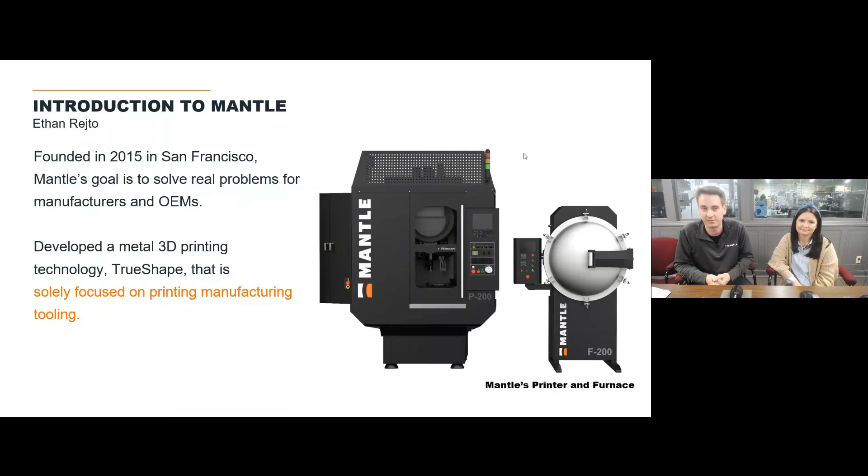Just a little bit about Westminster Tool. We are a predominantly injection mold builder located in the northeast corner of Connecticut. You've probably heard about us, we've gotten a lot of representation on our culture. We have a pretty unique culture here focused on emotional intelligence, accountability, improvement, and learning. We have an average age of about 35, and so we've definitely gotten a lot of attention for that. But we really pride ourselves on being manufacturing solution providers, so we really like to roll up our sleeves and solve problems for our customers.

And today we're going to talk to you a little bit about some of the ways that we've done that by partnering with Mantle.

In terms of what we make at Westminster Tool, on the left you can see we predominantly build complex injection molds, anywhere up to around 64 cavity, anything up to a 350-ton press so that we can sample it in-house before shipping it. We focus on intricate dimensional challenges where our pre- and post-value add services can be utilized. We also manufacture composite tools and high-performance components for the aerospace industry, things like molding PEEK, Torlon, Ultem, and we're AS9100, ISO 9001 certified, and ITAR registered.

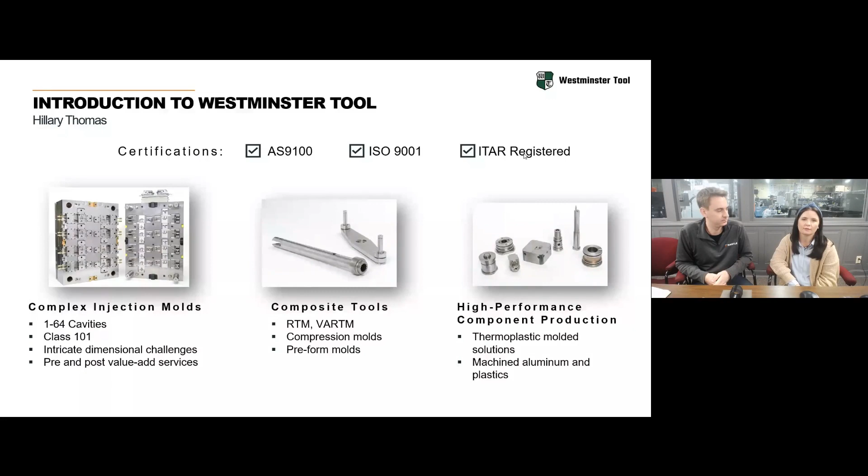So quick agenda for today. We'll start by talking about 3D printing and its role in toolmaking, both in the past and where it is today. We'll talk about Mantle's technology, how it works. Hillary will talk about Westminster Tool's experience with Mantle's technology and how they're utilizing it here in their tool shop. And then we'll look at a bunch of different use cases of Mantle's technology, some different applications of how a lot of different people are using this technology and adding value to their organizations.

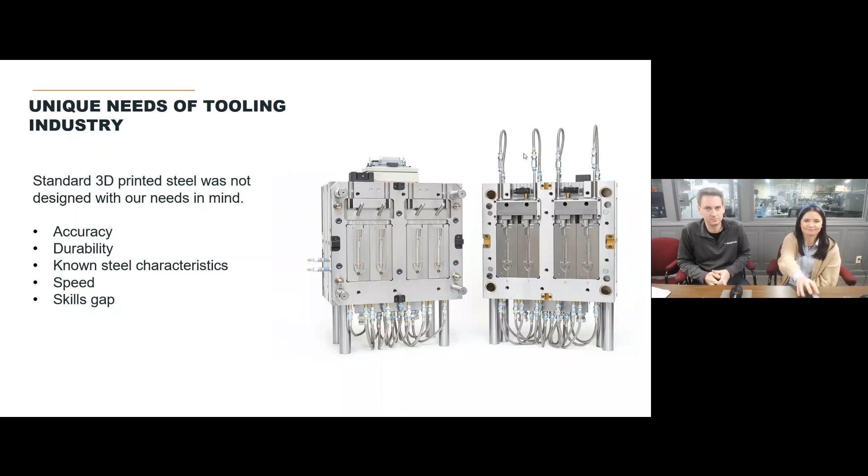So in terms of our specific journey with 3D printing, we've been exploring additive metals since 2017. This is mostly driven by the fact that we want to be a leader in innovation for our customers, but also our customers really needed us to expand here. Our customers have been looking for conformal cooling, and they've been looking for us to find ways to deliver faster and more affordable solutions for them.

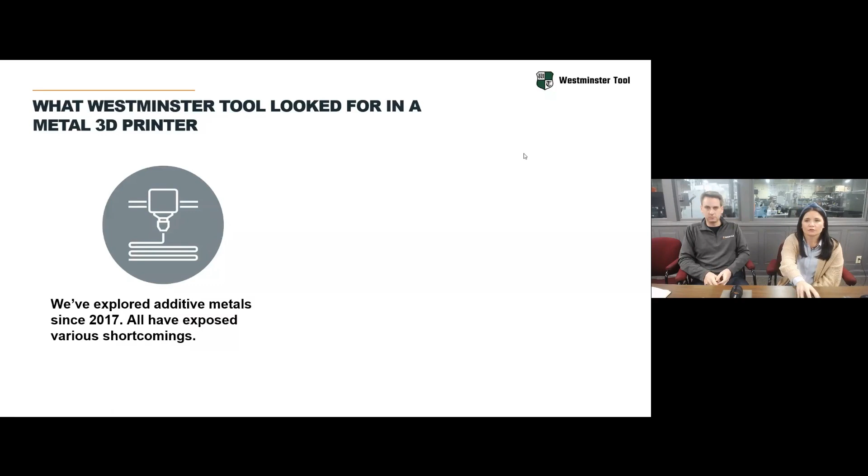So some of the things that we've been looking for, the first would be tolerances. We're hitting tight tolerances. Anything over plus or minus 3 thou really isn't going to get us close to where we need to be, and there's a lot of post-processing that's going to be needed in order to get us there. So that was really a key point. And prior to Mantle, there really wasn't a technology we had explored that could get us under 3 thou.

We're also looking for flatness and stability. I saw that there was a handful of tool makers here, or at least have tool rooms. And if you've worked with 3D metals before, historically the moment you go to machine them, they move all over the place. So if I have to have my most experienced tool maker, or carry a handful of spares, or go above and beyond in order to bring this piece of steel into spec, why wouldn't I just do it the traditional way? That's something we've really struggled with in the past.

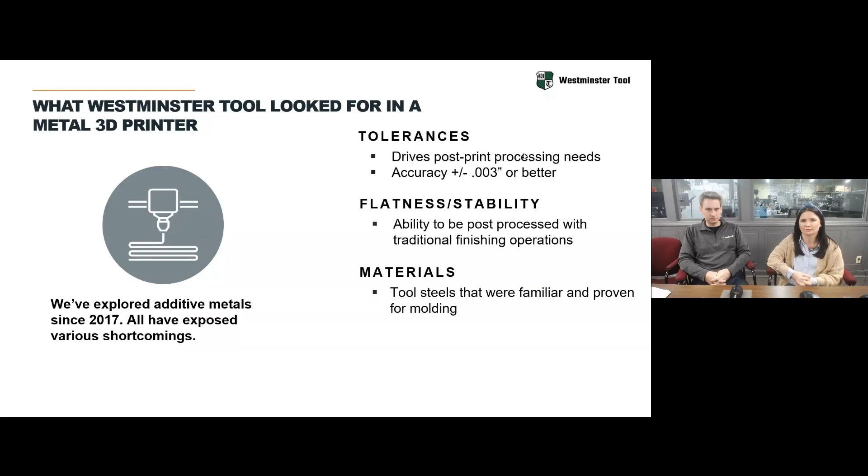Another thing is materials. We have experience where the tool steels weren't familiar or proven within molding. And so not only were we hesitant to utilize them, but we really weren't confident that our customers were going to be willing to integrate them into their production molds.

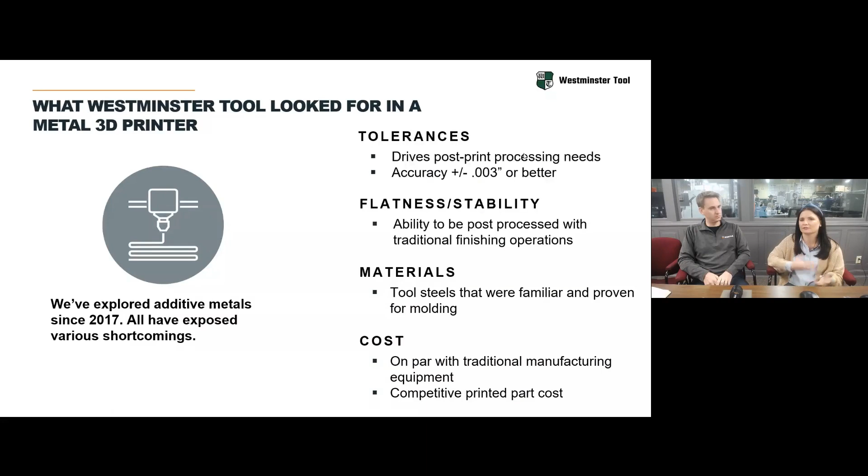And lastly, cost. So I look at cost in two ways. The first is my investment. As a tool maker, I only have so much capital investment that I'm making within a year, and I didn't want a 3D printer machine that was going to take up years of that investment. And I also didn't want to have to price my 3D printed inserts so high that it no longer was valuable to my customer. So this was kind of what we were looking for and the challenges we were seeing until we met Mantle.

So we met Mantle in 2019 at the AmeriMold conference, and we immediately started doing the basic tests that we were doing with all technologies that I'll show you in a moment. But they quickly were surpassing what we had experienced before, and we got very excited.

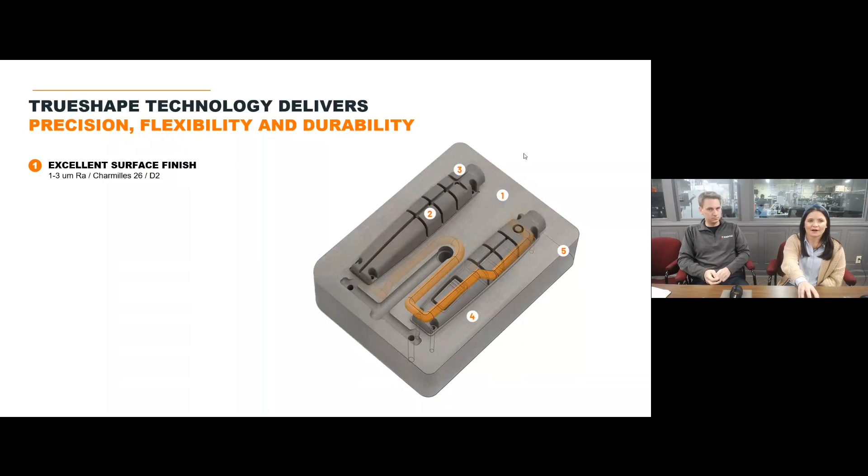Some of the things that we were seeing with them, the first is the surface finish. So they come off of the printer at a D2 or like an EDM Charmilles 26. And I have a handful of inserts here that you can see, but here's some examples of what it looks like. I didn't have to touch any of the part geometry in this. So that's what the surface finish looks like coming off of the printer.

And for us, that was huge. It also, you can see when you're looking at the prints, you can see the density of it. There's no voids or pitting, and that was consistent even if you sliced open a block that you had printed.

Another great thing that we saw with Mantle was accuracy. We're achieving plus or minus 1/1000th per inch. And this was huge for us. In some instances, since integrating the machine, we're seeing even tighter tolerances than that. So this was, again, a leap forward in being closer to that finished product after printing.

We're able to achieve very fine details with Mantle. We're able to get down to a 5 thou corner radius. And so we're able to achieve some of the sharp details that you're seeing in these images. And again, that wasn't something we had seen in the past.

Flexible cooling designs. I'm actually going to talk to you about a handful of conformal cooling applications we've done. But we did put Mantle to the test, and we wanted to prove out that the surface finish and density of this was actually going to withstand some of the cooling channels that we wanted to put in.

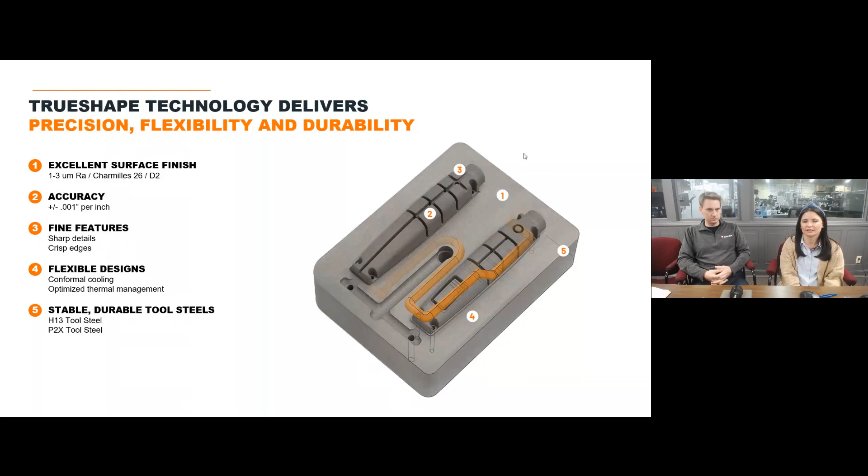I think a very important one for all of us is the stability. It performs and acts exactly like standard tool steel. It has the same chemical properties as standard tool steel. So they have an H13 and a P2X material, which I know Ethan's going to talk a little bit more about.

And lastly, the machine is extremely easy to use, and that was something we were very surprised to see. We would say you basically need some entry-level CAD experience, some entry-level CNC experience. But Ethan's going to tell you about how the programming really does a lot of the work for you. So the software does it for you. You don't need an expert in programming and understanding how to operate this.

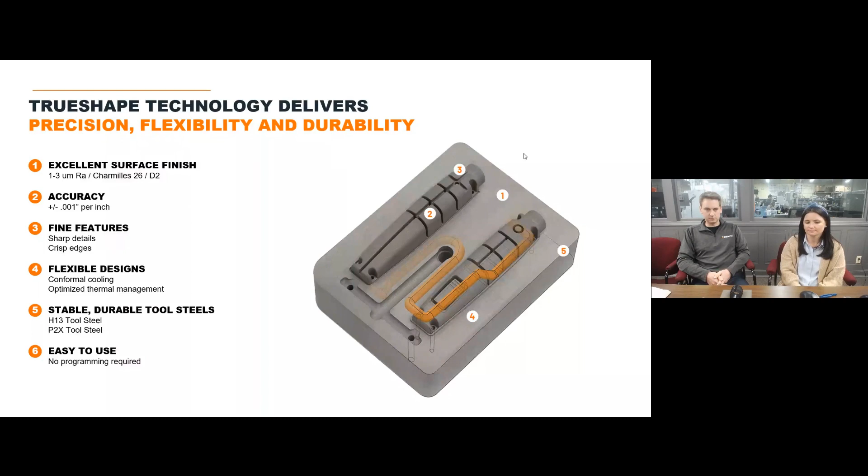So I think for most of us looking to integrate printed steels into our molds, this is really what matters. It matters that it is compatible with traditional manufacturing operations. And this was something that we spent years proving out with Mantle. We have polished it to an A2 finish. We have welded it. We have chemically etched it. We have wire EDM'd it. We have sinker EDM'd it. We've drilled, we've ground. I mean, we've done everything that you could.

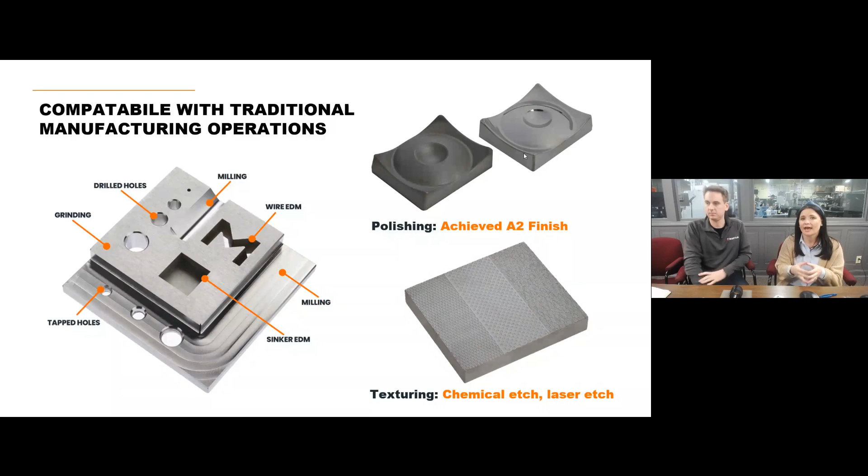Yeah, this is a really great photo here where you can see a handful of different operations being done. And what's impressive is not that you can do this. What's impressive is that I don't have to change my operations in order to achieve it. And so there's no added resource or added time in order to finish machining it. So the savings that you get from printing and sintering actually translate into value.

Awesome. Yeah, so as Hillary mentioned, Mantle's technology was able to achieve what they were looking for with metal 3D printing and what they needed for tool making. And the reason Mantle was able to do that was because Mantle was designed specifically for printing the tools that she's making and using every day. We set out to print the inserts, the molds, the components going into molds that tool shops, plastic processors, and injection molders are using, which is what's so unique about Mantle's TrueShape technology: we were designed specifically for printing the tools you're using every single day.

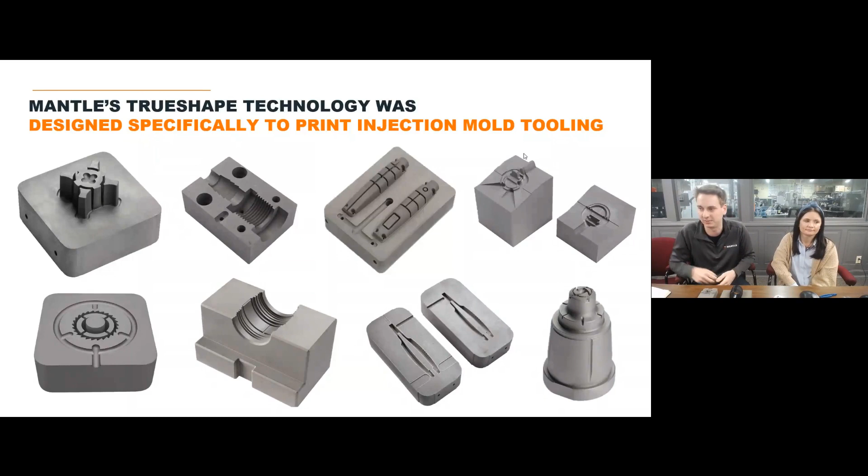So with Mantle's TrueShape technology, we're offering the accuracy of a CNC machine with the added benefit of a 3D printer. You're getting all those benefits that are widely known with 3D printing, from lead time and cost, to ease of use, to flexibility with design, but with that added accuracy of CNC machining. And I'll talk a little bit about how that's working in just a couple of minutes.

Additionally, the system is designed and priced for every single shop. As you may see, it looks very similar to a CNC. It's designed to be on the shop floor. It's designed to sit next to your EDM equipment and your CNC machines and your grinding equipment. It will sit right at home on your shop floor, making it very easy to implement and very accessible for all shops and processors.

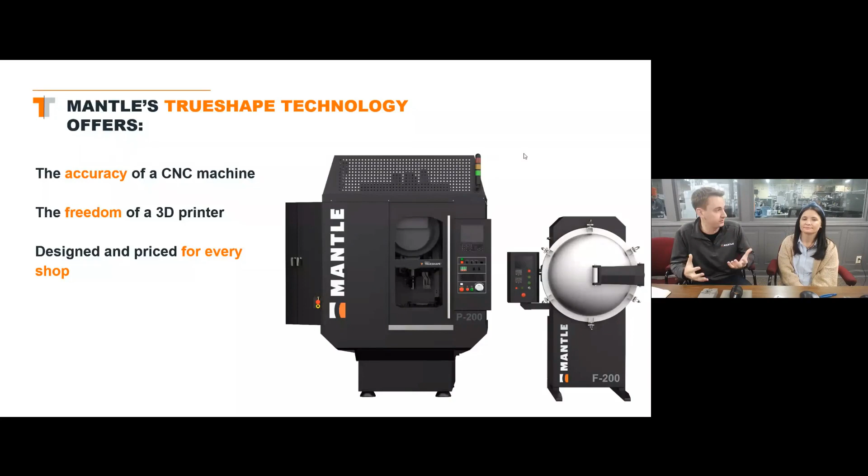One thing I want to say is that Mantle didn't just set out to design a very cool 3D printer, or something that can print accurate parts or surface finish. At the end of the day, Mantle set out to make a difference to the injection molding community, to the tooling community. And Mantle technology has shown results.

We're going to talk a lot more about use cases later on, but I just want to briefly talk about this relatively small insert that was used for molding a consumer product. The accuracy on this insert was within a thou. The surface finish was equivalent to a standard insert that they would have made with traditional processing.

The parts were all standard to the traditional process as well. And after over 200,000 shots, there was no wear on this insert. But what really matters was that the company was able to produce this insert with a 70% lead time savings and a 65% cost savings.

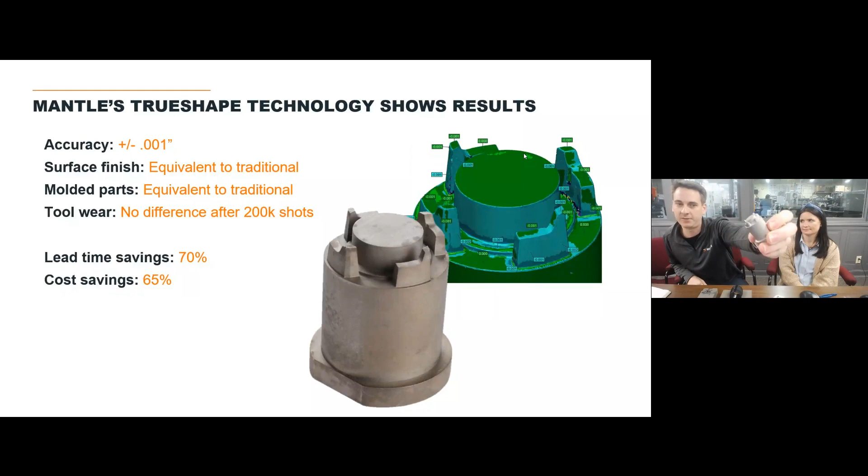Because at the end of the day, it's great that we can print accurate parts. It's great that we can print parts with beautiful surface finish. But what really matters is how are we adding value to a manufacturer, and how are we making a difference and solving the problems that people are having today, which are often really high lead times and very high costs.

Another quick poll before we get into talking about how our technology actually works and how our 3D printer works. I'm curious to hear, what is your current experience with 3D printing, and how are you using 3D printing today? Awesome. Seeing some results come in. Yeah.

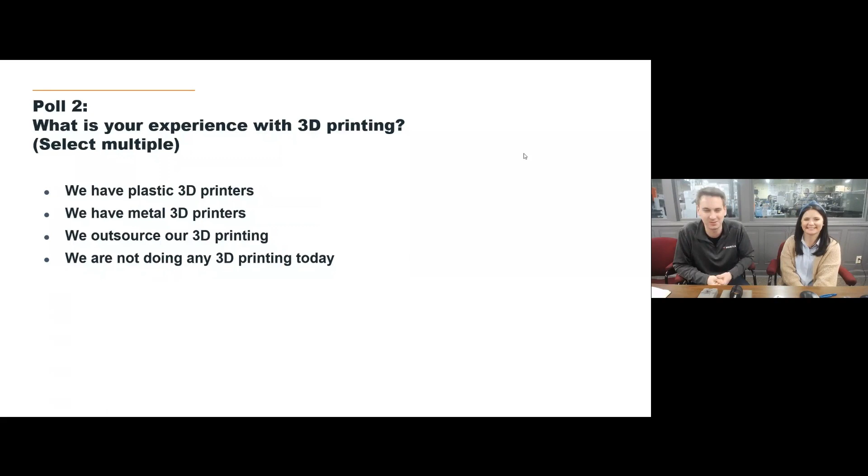It's great. So it looks like a lot of people doing plastic 3D printing, which is awesome for prototyping, form and fit, for jigs and fixtures. Awesome to see a lot of people doing plastic printing, a couple people doing metal, a couple people outsourced, and then obviously a couple people who aren't, right, that's why you're here today, to learn more about 3D printing in general and maybe looking to do it in the future.

So to talk a little bit about how Mantle's technology works, Mantle's technology is really a solution. We call it TrueShape technology, and it's made up of a couple of different building blocks that you're seeing on the screen here now. When it comes to hardware, there's both a printer and a furnace. And again, as Hilary mentioned, designed to be very, very easy to use. Minimal training, very easy to operate. It's designed to go onto the shop floor using similar power and air requirements, etc., so it will sit right at home on your shop floor.

When it comes to software, we're kind of the brains of the whole TrueShape operation. Very, very easy to use. It's going to automatically generate all those tool paths for you, both additive and subtractive, and we'll talk about how that works. And of course, there's no CAM programming required, so you don't have to be an expert in any CAM software. Realistically, we could train anyone on this call how to use this technology very easily in just a couple of hours.

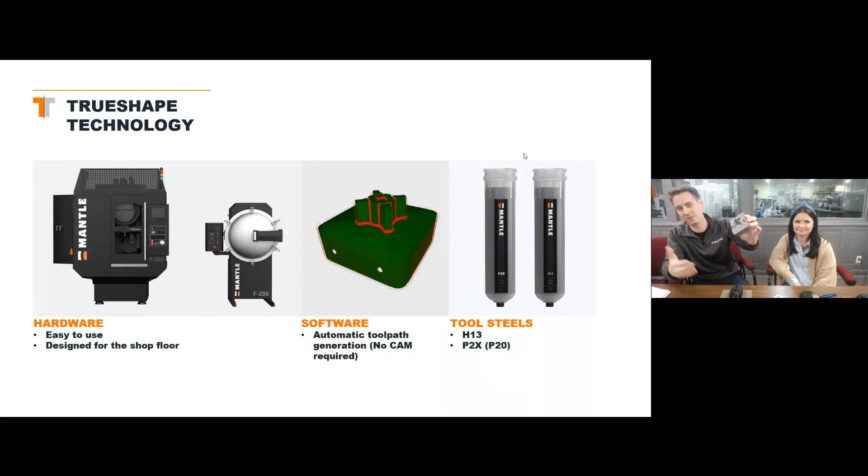And then finally, our materials, our tool steels, as Hilary mentioned, H13 tool steel, a very common tool steel in the injection molding industry, and then P2X, which is very similar to a P20 material. Our tool steel, as you may see, looks a little different. It starts as a paste, and I'll talk a little bit about how we go from a paste into a final steel insert that I'm showing you here right now.

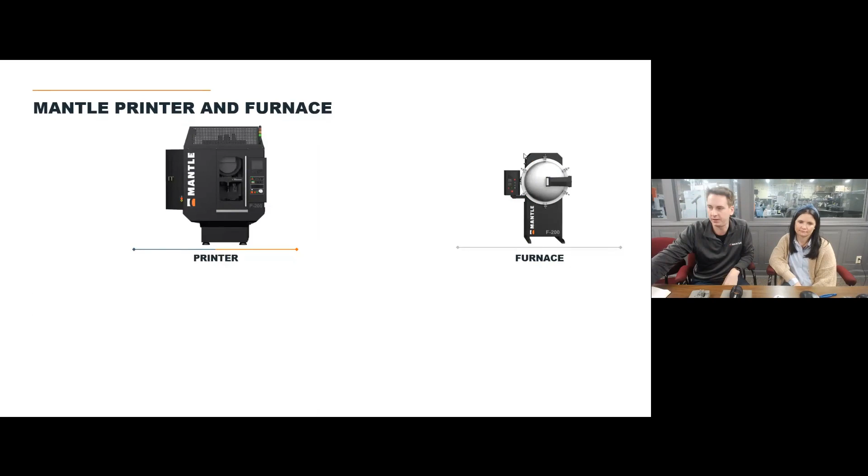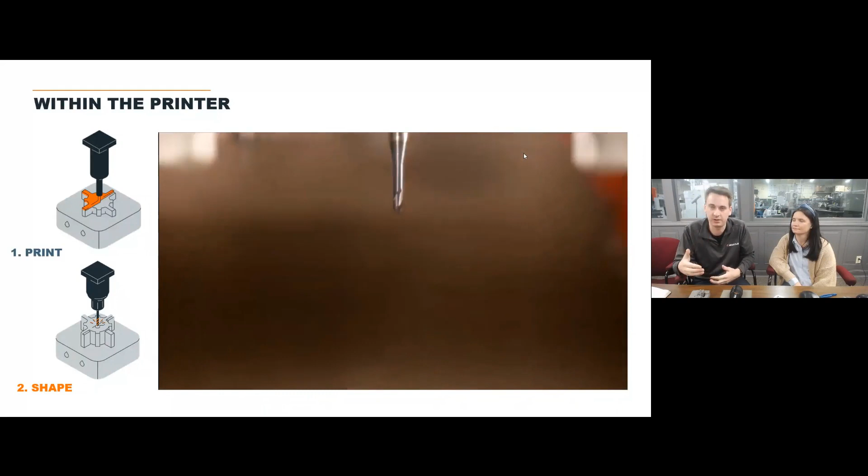So within our two pieces of equipment, the printer and the furnace, there's really three main steps happening. Within the printer, we're doing our printing and our shaping. Within the furnace, we're doing our sintering. So within this printer, we're laying down our paste, which is our metal paste, a combination of metal powder mixed with some solvents to allow it to flow. We're going to print a layer of that paste, and then every single layer we are going to mill perfectly flat with an end mill.

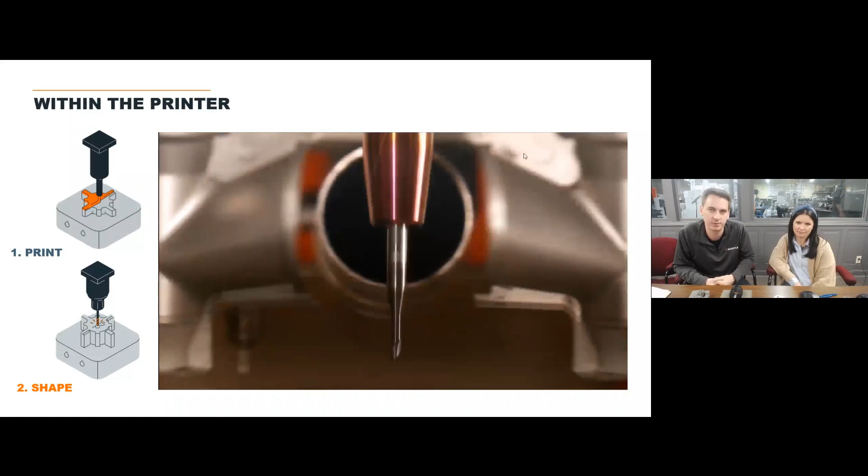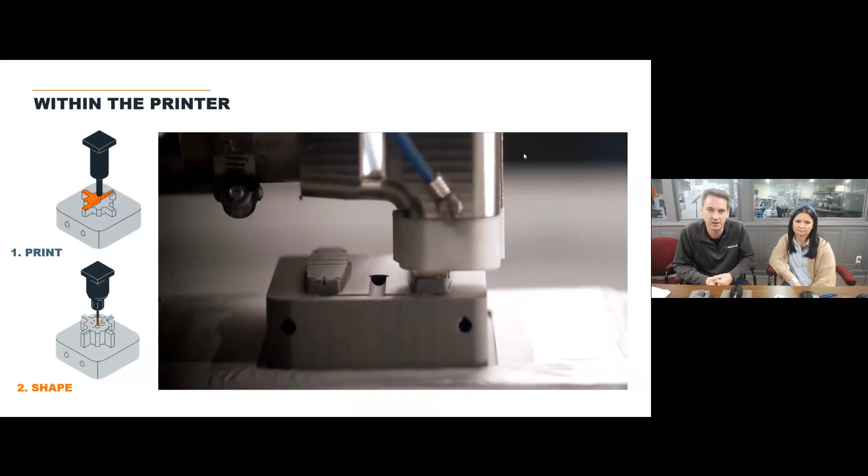We're then going to deposit more layers, and after a couple of layers, usually about 10 layers, we're going to come back and refine that shape with high-speed cutting tools to add feature details, to remove layer lines that are very common with most 3D printing processes, and really produce a very crisp, accurate part. So all within our printer, we are printing, depositing our paste layer by layer, and we're also milling the part to refine that shape and add that feature detail. So that's where we get our hybrid process inside the printer of printing and shaping.

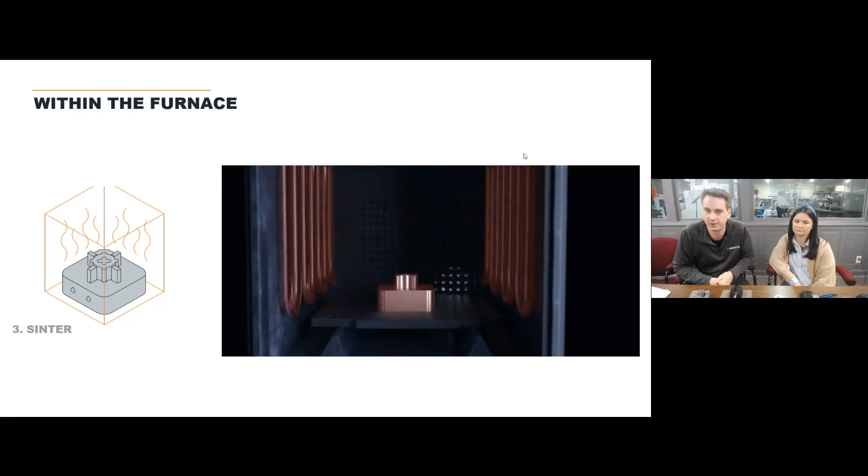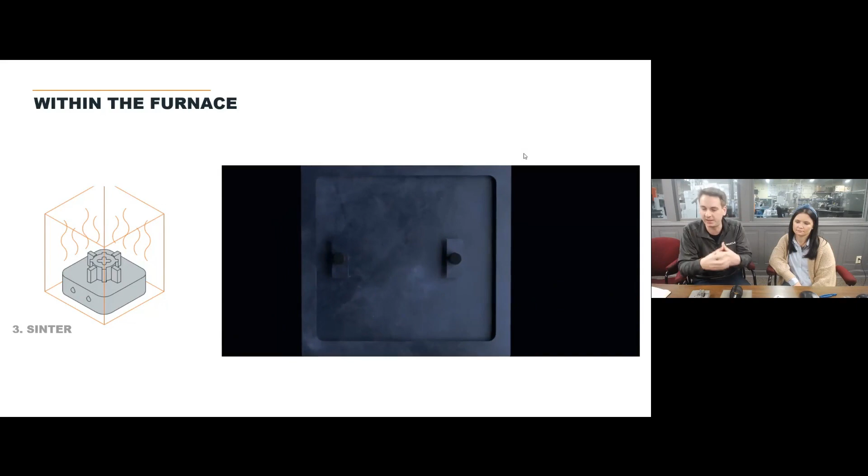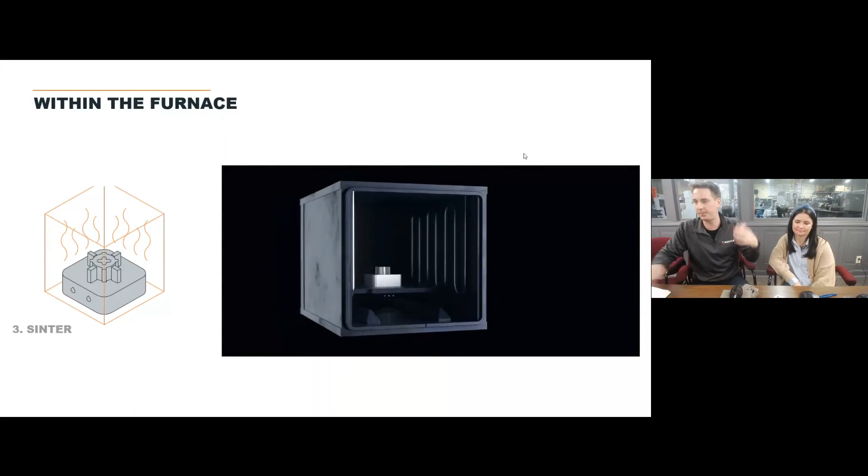Within the furnace, we then take our entire plate, or the part, out of the printer and put it into the furnace. The furnace gets just below the melting point of the material, in this situation our tool steel, and it's going to densify our part. It's going to take that metal powder and sinter it together, and the result is a dense, strong, durable tool steel component. So three real steps here: print, shape, and sinter. But the result is you get an insert that can be used for molding directly with very minimal post-processing.

Example here of a slide, a relatively big part that I have here, but this slide was able to be used without any post-processing to the feature detail here. It just did a little bit of grinding to get it into the mold base. And this was used to inject some components out of a 30% glass-filled PEEK. So a very abrasive, very high temperature material.

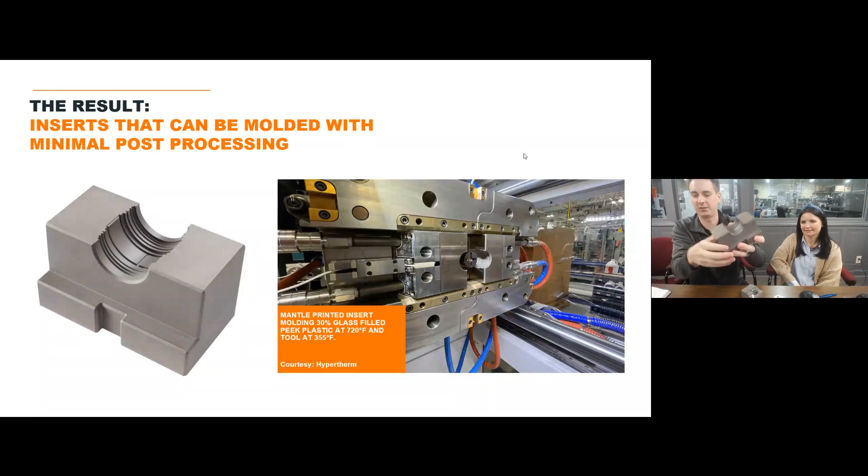It's actually kind of heavy in my hands here, but just speaks to the durability and the fact that this is the result out of the furnace. So 3 steps to get you an insert that can be used with really minimal post-processing.

Yeah, so as we've kind of alluded to, we did get a beta machine this year. And so I just want to walk you through a little bit about what we've been doing with it. So we received our machine in June. And since receiving it, it's been almost running 24/7. We've been utilizing it internally. We've also been utilizing it with some OEMs directly, as well as contract manufacturers and even other tool builders.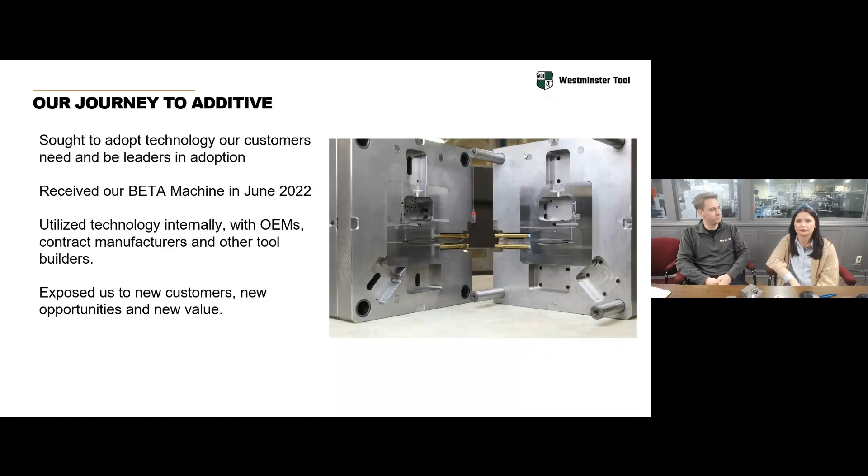And having it just since June has really exposed us to not only new customers and new opportunities, but a whole new value stream that we really didn't have access to before. So what are the ways that we're using it? What I'm going to do now is just walk you through some examples of how we've been using it at Westminster Tool. So the first way that we're utilizing it is for conformal cooling, and you can see an example here in the image on the right.

So Westminster Tool has already been using Moldex 3D to drive decision-making in terms of cooling and gating to optimize our molding process and our tool designs prior to sampling. So this was kind of a natural integration. We've already been doing conformal cooling, but now we have the ability to manufacture it in-house. We have better control, and we're also able to do it much more affordably and quickly than we could in the past. We were using braze technology before.

It would take about 6 to 8 weeks for us to get a base, just basic geometry, and we'd have to do all of the post-machining work to it. It did move all over the place, and so we had some of those challenges, whereas now we're able to get pretty close and then go in and do any finish machining that's needed. And with this, we've seen a huge reduction in cycle times and scrap rate.

I'll give you an example coming up here, but in this example on the right, this was actually an industrial cap. The inside has threads, and the customer was actually jumping the threads instead of unscrewing. So as you know, you have to wait for the perfect amount of cooling to happen, just enough for those threads to solidify and be able to jump them without damaging them. And they found that this was driving an increase of 10 to 15 seconds in their cycle time.

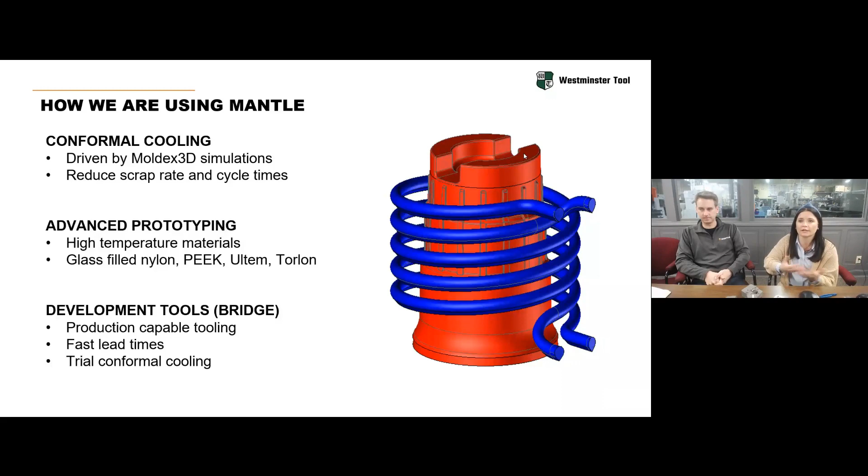So we recently did a project with a lot of complex shutoffs that we were able to manufacture in 3 to 4 weeks. And something like this would have historically taken us at least 6, if not 10 weeks or more. And so to be able to accomplish some of the geometries that we are with the minimal post-processing has really made a difference for us and our customers. It's also a great way to trial conformal cooling in a quick way that you're going to duplicate in a production environment.

So some examples. So some of you may have seen this before. This was actually a project that we did when trialing Mantle, when we were first kind of evaluating the technology. And the key here was that we wanted to explore something that we already had internal experience molding. So this was an automotive part. It's a 43% glass-filled nylon, and we had molded for this customer about 10,000 once in a while as needed.

So what we wanted to do is trial, if we were to integrate conformal cooling as we normally would, what could the impact be actually on our customers' output? So we asked our designer to put some complex lines in there, because what's the benefit of printing if you don't get complex? And so we challenged him. These are the lines that are put into it. This is actually the component here. So those lines are inside of this.

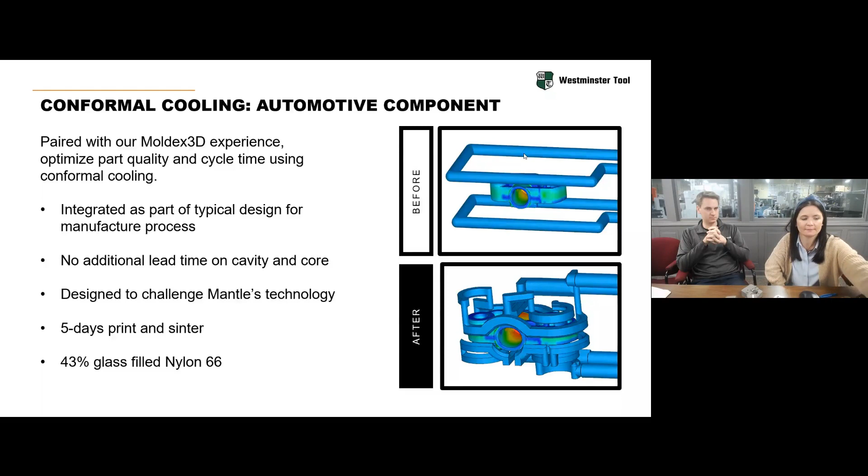And it took us 5 days to print and sinter that. And then we had another week of post machining. And you can see those lines there. So we, in this instance, were able to reduce the cycle time by 25%. It came off with a D2 EDM finish, which was perfectly fine for this case. And it also saved us at Westminster Tool 25% of our attended manufacturing hours versus traditional. The tolerances were all within 2 thou on a 3x3x2 insert.

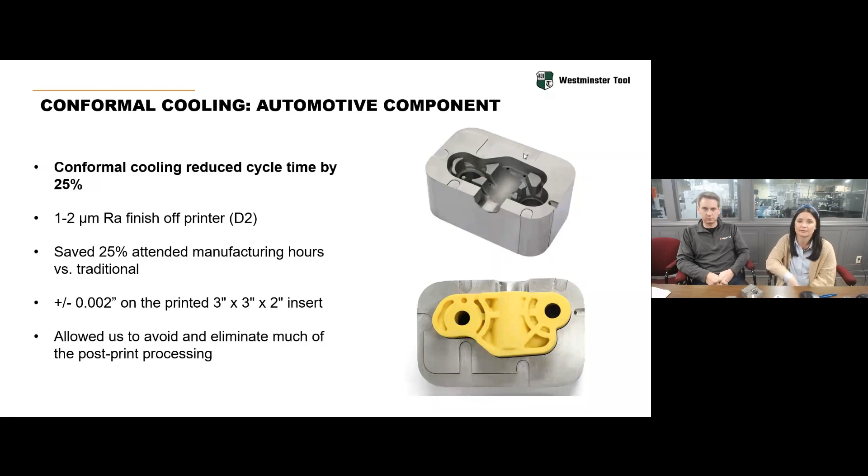And it just really allowed us to eliminate a lot of the post-print machining that we had experienced in other cases. So we really challenged the complexity that we could accomplish with Mantle, but we also were internally measuring how much time we could actually reduce in manufacturing these. And we wanted a controlled environment where we can know we made these inserts traditionally before and what happens if we make them later. So not only did we make them faster, but they also had this advanced cooling in them. And so that was a really awesome example of what we could do.

Another project that we did was what we called the tweezer project. So this was actually for a compounder who was releasing a new material. It was a bio-based, a castor bean-based, recyclable 65% glass-filled PA11. And they needed a robust prototype quickly. They came to us about a month and a half before a big trade show, and they wanted a really high quality part quickly utilizing this high performance material.

And so we went from, they actually just gave us a concept. They said, hey, we want something like this. It wasn't even this actual pair of tweezers. And so from design to molding 2,500 parts for them, it took us about 3 weeks. And so you can see, you're not gonna be able to see well, but we did not touch the actual part geometry on these parts. We only had to square up the block and put in ejector pin holes. I'll show you in a moment.

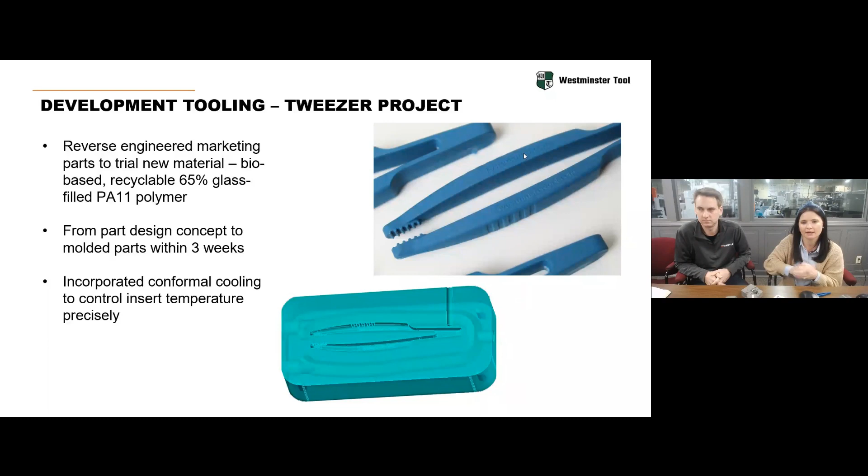But I did want to point out that in the bottom picture here, you can see that we also put a conformal cooling line, and we utilized an extra plug hole in the back just for easier access for cleaning that U shape if needed. So in terms of the details of what did we have to do afterwards? So now I think I've kind of started to build a case of what you can do with Mantle.

After we printed it, we had about 7 days to finish machining it. We did not touch the part geometry. So the tweezer geometry itself was not touched. What we did have to do is we burned in the subgate. We hole popped our ejector pin holes. We did machine in our primary vents just based on the tolerance of those. We ground the entire perimeter of the block. We squared up the block, and then we ground the shutoff surface just to make sure we had a really good shutoff. And then in this instance, we laser engraved the company websites.

So when I say I had 50% of the cavity complete, it's not the part geometry that I had to do. These were just the additional operations that you need in order to make an injection mold work. In general, with Mantle, the post-processing that we have to do is for tight tolerances. So if that 1 thou isn't sufficient, then you'd have to go in and achieve that. Tapping holes, any design constraints that we might not be able to achieve, mold fitment and surface finish. So like we've mentioned multiple times, it comes off at like a Charmilles EDM finish. So if you do need a B or an A finish, then you'd have to polish that.

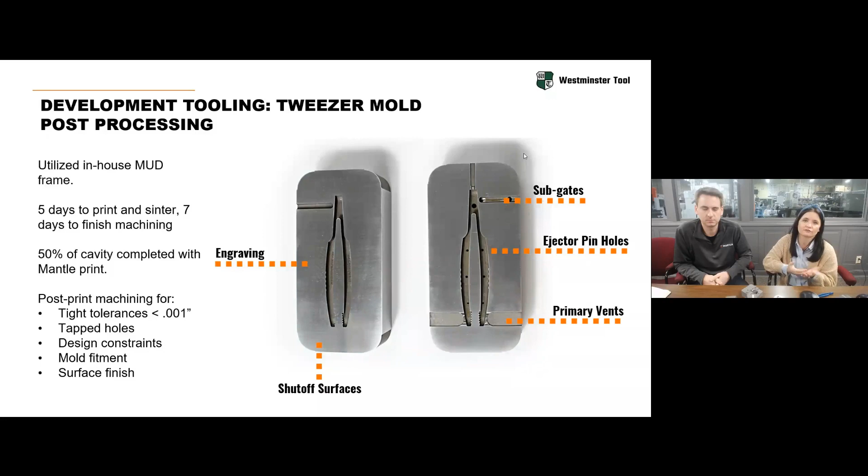And the last example that I wanted to show you was we were actually trying to address 2 challenges. This was working with Pepsi. There were 2 challenges that they were having with this blow mold base. The first is that after a few hundred shots, they started to get heat-related blushing. And so they were getting cloudiness at the base of that bottle, which obviously isn't acceptable. And so while these were for trials, that was really difficult to be dealing with. They have to let the part cool down first before going back to do more.

And they had been molding these with a plastic material, a PEEK material. That didn't last as long as they wanted. As soon as they're done prototyping, they go into pilot, and they need to run about 10,000 or more shots. So what we were trying to do is both eliminate that heat-related blushing and give them a base that could last longer, that could go straight from prototype into that pilot development area.

It took us about 8 days to print and sinter this. It was about 4.5 inches in diameter. And we only had a day of post-machining. We ground the top and bottom, and we hard milled the OD of the base and the O-ring. And so I tried to give you some good examples. We've done many more projects of even just printing for people and letting other tool rooms finish machining them. But so far, we've been really impressed and really grateful for the ways that we've been able to use Mantle.

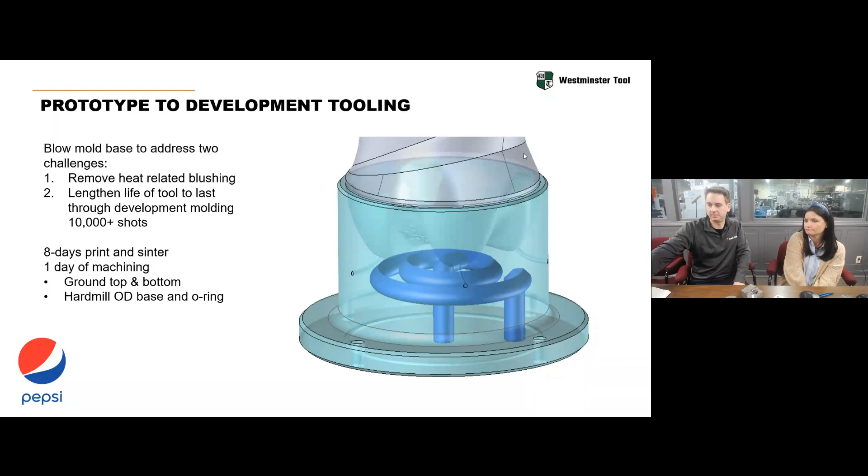Awesome. Thank you for that insight and all those awesome applications. I just have a couple more additional use cases that I would love to share with you, and then we're going to do a bunch of Q&A at the end here.

The first one is from Fathom, located in McHenry, Illinois. If you're not familiar with Fathom, they're one of North America's largest on-demand digital manufacturing platforms. They're located all across the country, doing all sorts of manufacturing, from 3D printing to injection molding to machining, etc. Summit Plastic and Tooling, which is a subsidiary of Fathom, is a state-of-the-art mold making company. They provide high-quality plastic injection mold design, mold making, as well as close tolerance injection molding. They have 15 presses ranging from 40 to 350 tons, and they have capabilities of doing a lot of different advanced molding techniques such as multi-shot tooling, bi-injected tooling, insert over molding, as well as most conventional molds.

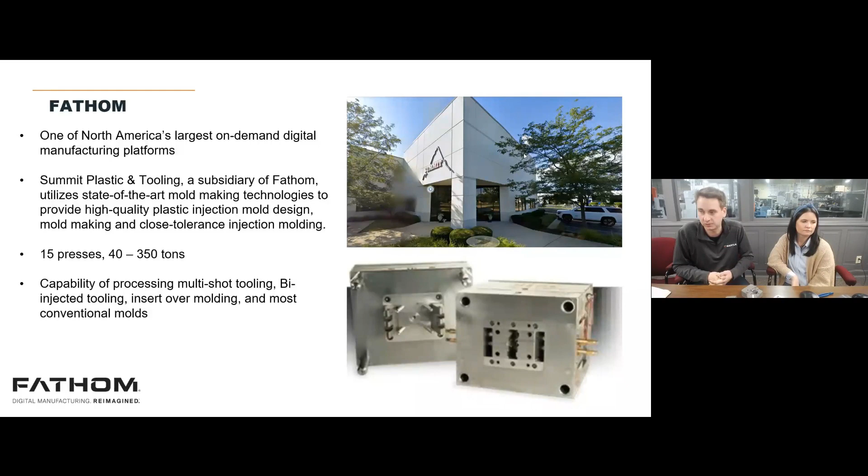The application we looked at with Fathom was this dental guide for this dental component. It was a customer that was looking to ramp up production, so was looking to get some parts made as they were looking to move into production. The part featured a lot of very intricate details that would not have been able to be machined, so it would have required extensive EDM work, sinker EDM work. So Fathom identified it as an awesome part to try Mantle's technology with. With Mantle's technology, they were able to see a 40% reduction in lead time. That went from 200 hours down to 110 hours.

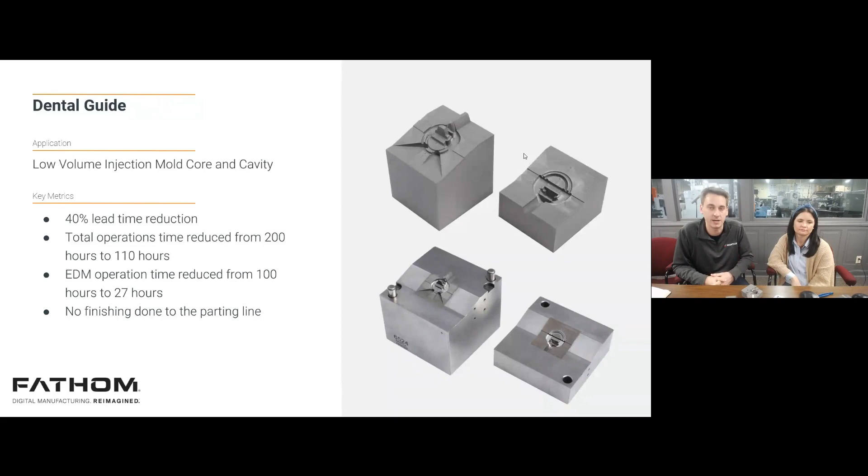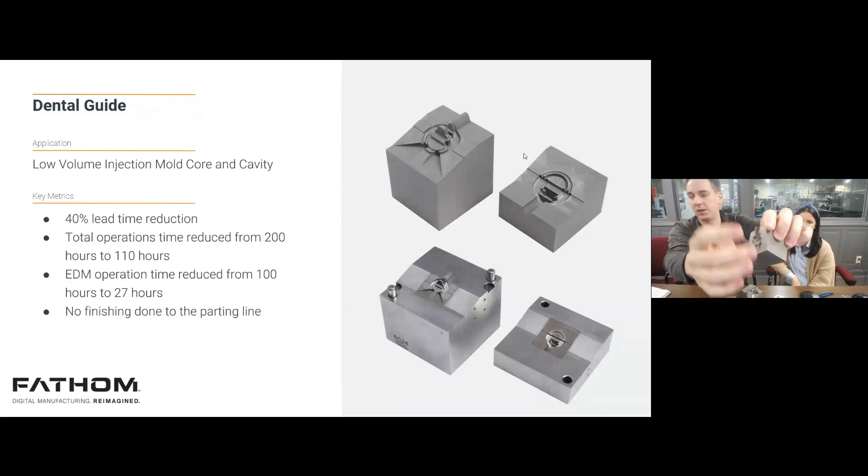Most of this savings came from reduction in EDM, because they didn't have to do anywhere near as much EDM work because they were simply able to print the features into the part. I should have held up the parts for you to see here, which the tool has right here. Additionally, there was no finishing done to the parting line. They still had to do a little bit of EDM work to touch up some of these features, as you're seeing in here, and they did a little bit of polishing to the insert as well, just to ensure they got that really nice surface finish on the final molded part. So a great example of Mantle technology where they're able to eliminate a lot of EDM work, which resulted in a 40% reduction in lead time.

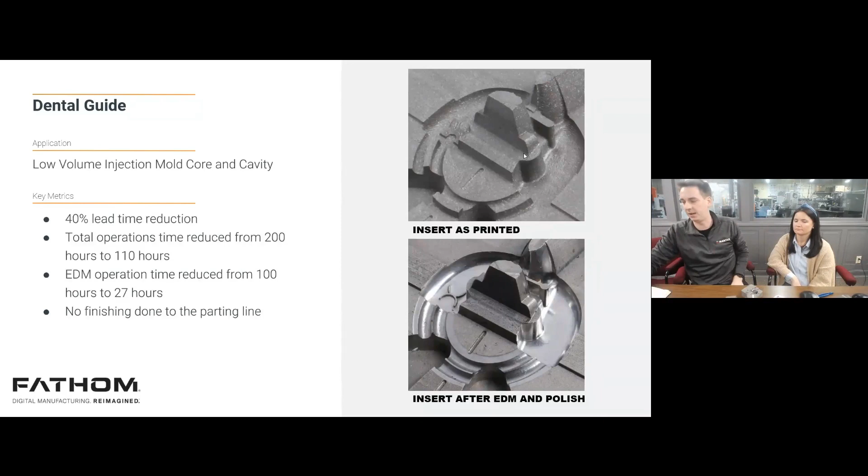And just comparing how they would have made these parts with conventional toolmaking versus with Mantle's technology, you can see they're able to remove, of course, that programming, that rough milling. They still had to do some heat treatment as they heat treated the part after printing. They had to do a little bit of fixturing, much less EDM work, and then a little bit of final finishing. So you can see how they're able to go from 200 hours down to 110 hours, which is just a great example of an application where even though they still had to do some traditional post-processing and some finishing to the part, they still saw a huge reduction in lead time.

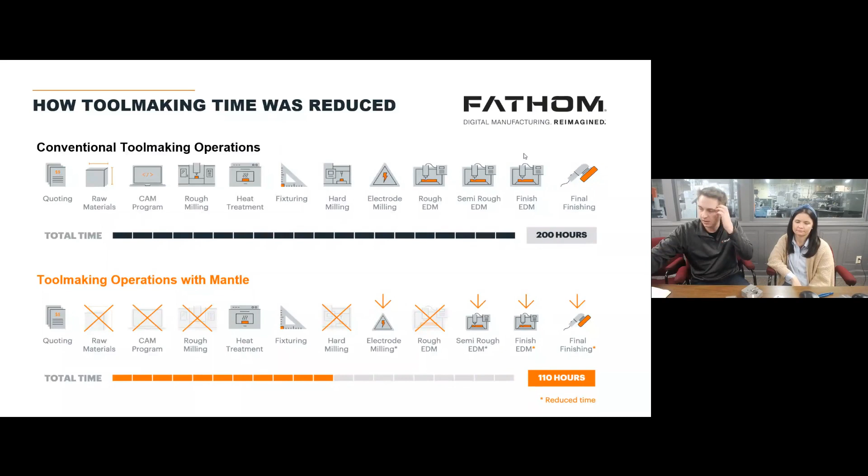Another great use case is Nicolet Plastics. They have a couple of different locations located in Wisconsin. They are an injection molder that is specialized in molding of complex parts in really all sorts of different volumes, from low, medium to high.

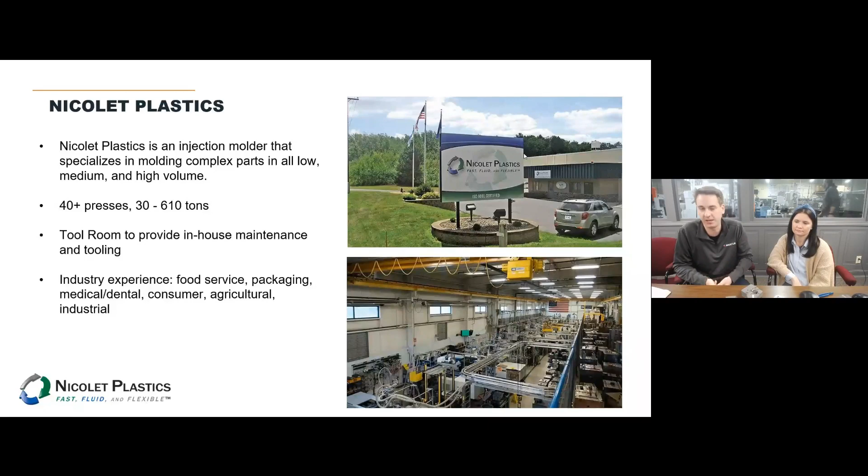They have over 40 presses ranging from 30 to 610 tons. They have a tool room that can provide them both in-house maintenance as well as end-use tooling for their customers. They work across a wide variety of different industries, everything from food service to packaging, medical and dental applications, consumer, agriculture, and even industrial.

The application I want to share with you from Nicolet was this mold, or the core. There's actually three pieces: a core, cavity, and an insert that goes inside of this slot here. This was used for molding a cam lock latch, which is used to hold a PC or tablet in an emergency vehicle. When you see a police car and they have their computer up on the dashboard, they have this device that's used to hold that computer in place.

The actual part was relatively complex, as you can see from all these different angled faces here. So again, this would have required extensive EDM work to produce this part. In addition, the actual plastic part was being produced in a nylon 6/6 that was 35% glass filled, so a relatively abrasive material that required a tool steel insert.

Using Mantle's technology, they were able to go from a 6-week lead time down to just 2 weeks. In terms of operation time, it went from 150 hours of operations just down to 11 and a half hours. All they had to do after printing was complete was dust up the parting line, grind the outside, and add the ejector pin locations so they could get it into the mold frame.

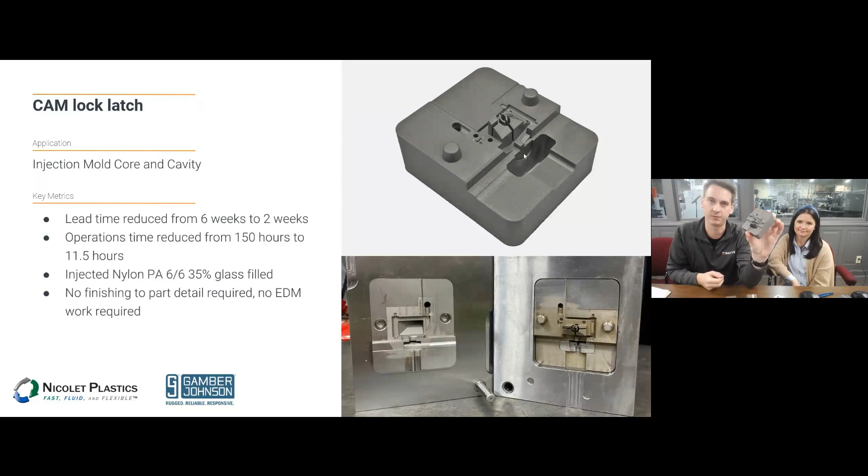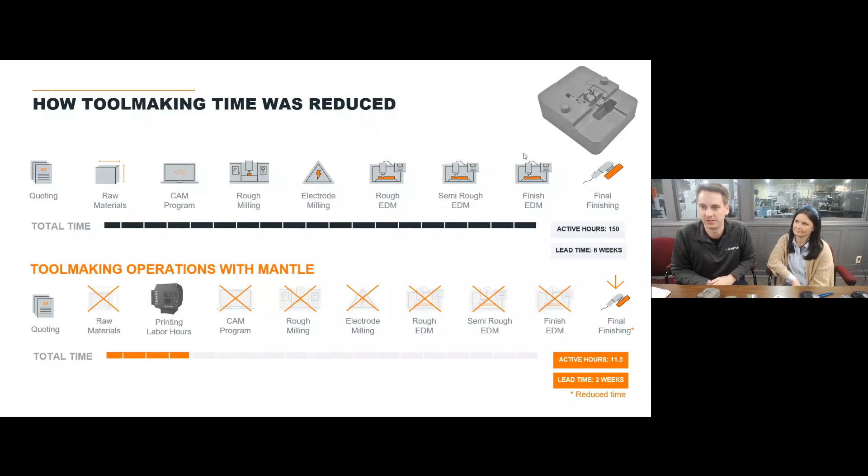So really a massive reduction here of 6 weeks down to 2 weeks, most of that coming from the ability to remove all the EDM work that was required. Again, looking at how they were able to reduce that tool making, really cutting out almost all the operations that would be used for traditional tool making processes to produce the part with Mantle, going from 6 weeks down to just 2 weeks. Just a great example of Mantle. I really like this part. Hopefully you can see that okay on your screen.

Lastly, I want to share an example from Tessy Plastics. They're located in a lot of different locations around the world. Founded in 1973, they've grown to become a very large-scale global contract manufacturer with almost 2 million square feet of facilities. They have a wide variety of different capabilities, everything from product design to rapid prototyping, tool design and build, automation, assembly, and of course, plastic injection molding.

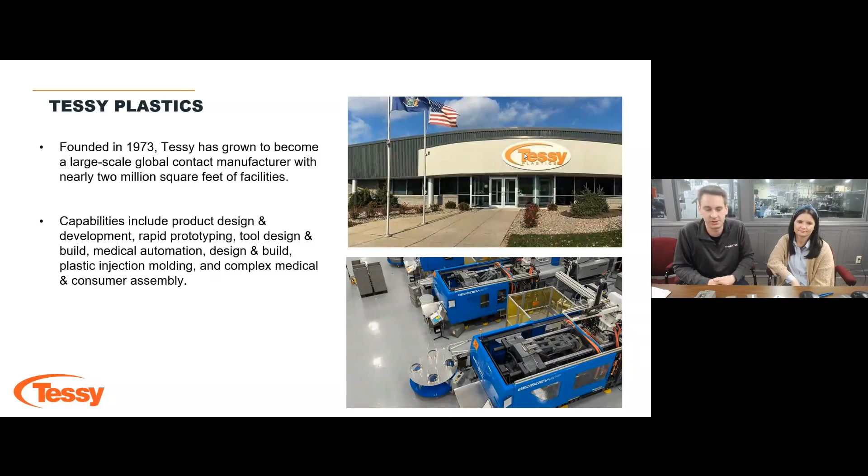The part I want to share with you today is Tessy's tool that has 32 cavities that's used to mold 6,500 of these deodorant stick thumb wheels, which I'm sure looks pretty familiar to many of you used to advance your deodorant stick up through the tube. 6,500 of these per day in a polypropylene.

What Tessy wanted to do was evaluate the durability of Mantle's material through a study. So what they did was they took 3 of the inserts out of the tool, 3 of the 32. They printed 1 in Mantle's H13 tool steel, 1 in Mantle's P2X tool steel, and they had 1 freshly machined out of S7. The tool has been running since February of 2021 and has experienced over 1.4 million cycles and counting.

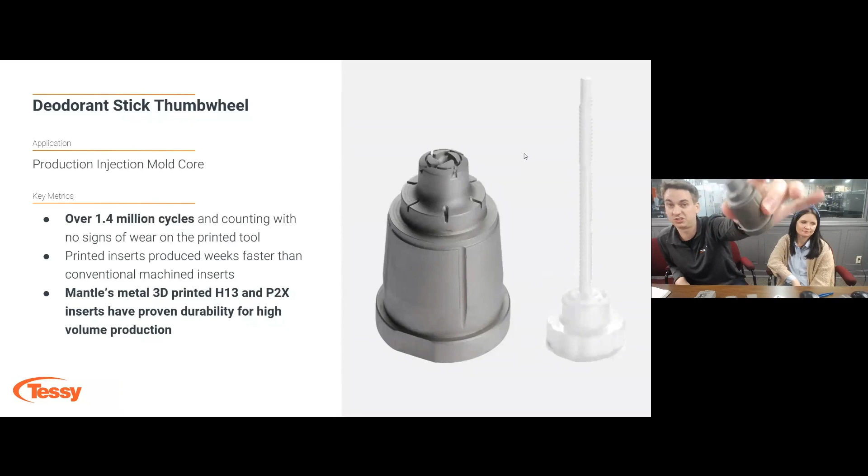That could be closer to 1.5 million cycles because it's running as we speak, and they've seen no signs of wear on this printed tool, which is especially significant since this has a lot of shutoffs on it, which is actually being shut off with S7, and they have seen no signs of galling, wear, or any flash on the parts. So this was just a great example showing the durability of Mantle's tools, and that they are true production tools. While it's great for prototyping, you can go to production with a Mantle tool.

And again, they were also able to produce this. This was about a 54-hour print, 6 hours of post-processing, compared to 150 hours to produce the insert via traditional machining.

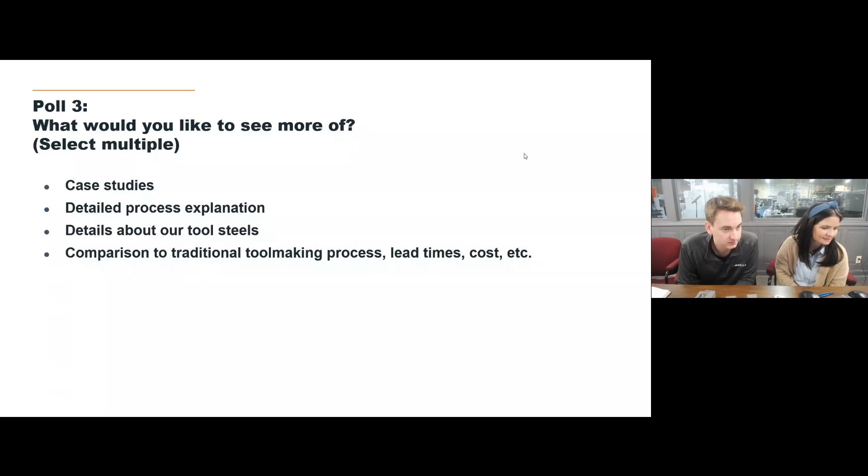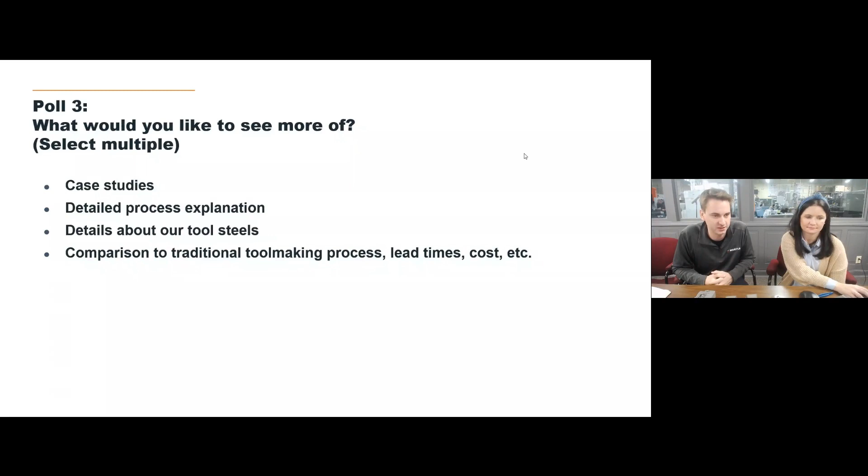Comparison, yeah, not surprising seeing a lot of people respond to that. When I was writing this response, I figured they'd like this one, which is definitely something we're always looking to do: make comparisons to traditional processes and help educate on when it makes sense to use Mantle versus when it makes sense to use a traditional process. It's something I think we can do a good job of educating the industry on. This is super helpful for us to see, just to help plan what we'll be doing for the next webinar.

Let's just quickly jump to here, but at this point we're happy to take any questions you have.